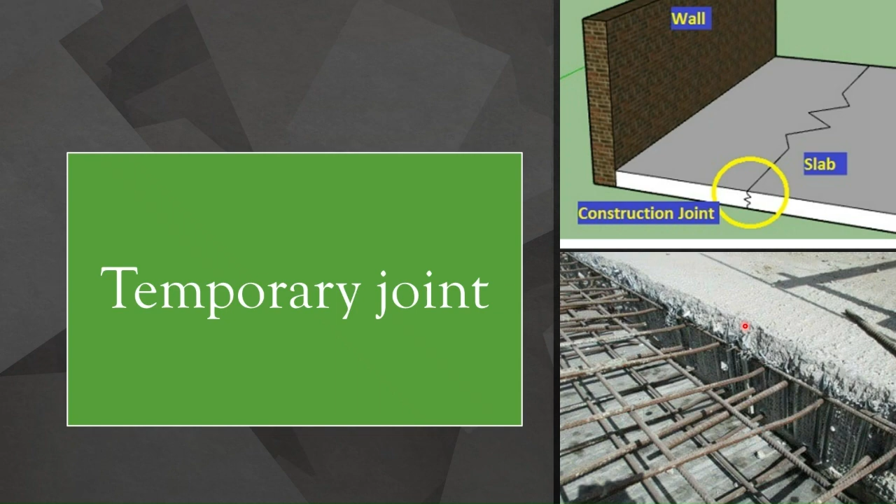The purpose of construction joints. It allows a continuation of work after a break in concreting, and it also helps to manage shrinkage, and it allows structural integrity and load transfer between old and new concrete. And it also prevents uncontrolled cracking.

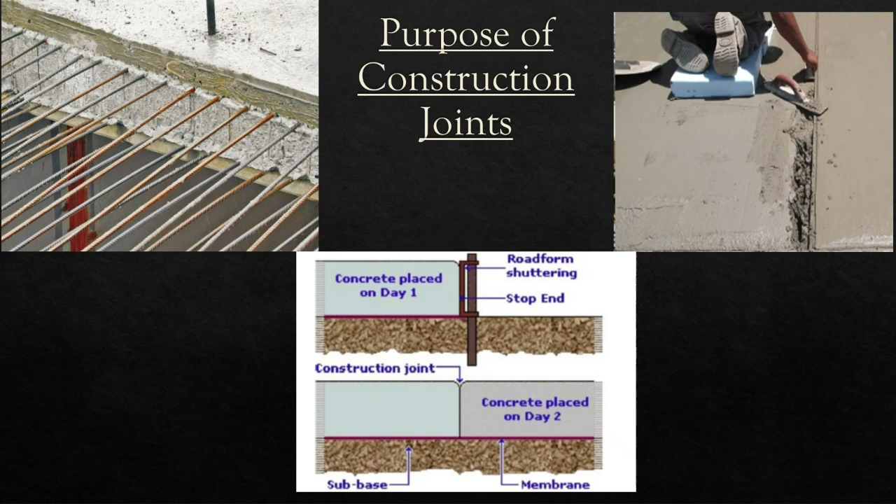Types of construction joints. First one is vertical joints. Vertical joints are common in slabs, beams and walls. And next one is horizontal joints. It is mainly found in columns and walls when concrete is poured in lifts.

Next one is keyed joints. It includes interlocking shapes to improve shear. And next one is dowel joints. It is mainly used with steel dowels to transfer the load across the slab.

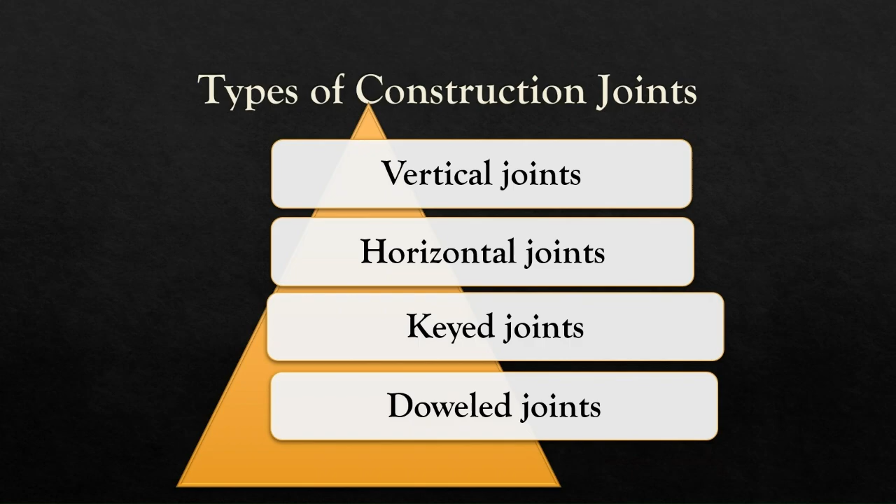In beams, construction joints can be provided near the point of minimum shear. And in slabs, it can be provided away from concentrated loads or mid-span. And in columns, it can be provided just below the beam or slab level. And in walls, it can be provided above the base or aligned with the floor levels.

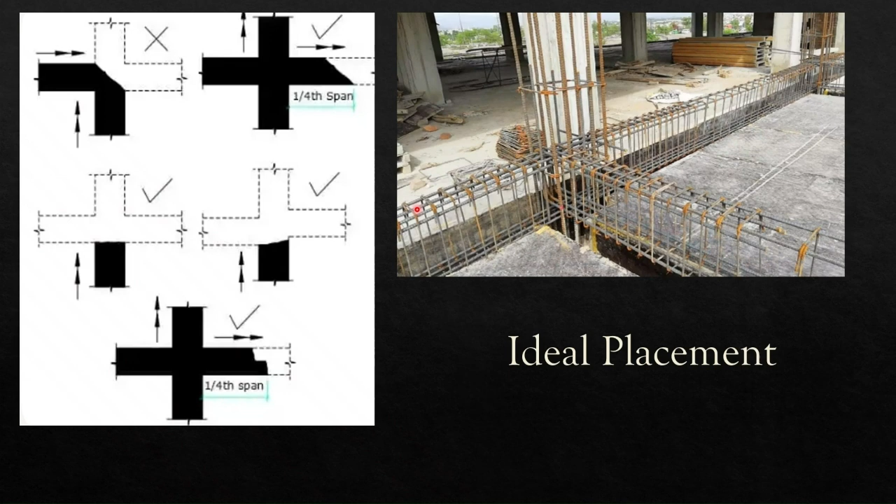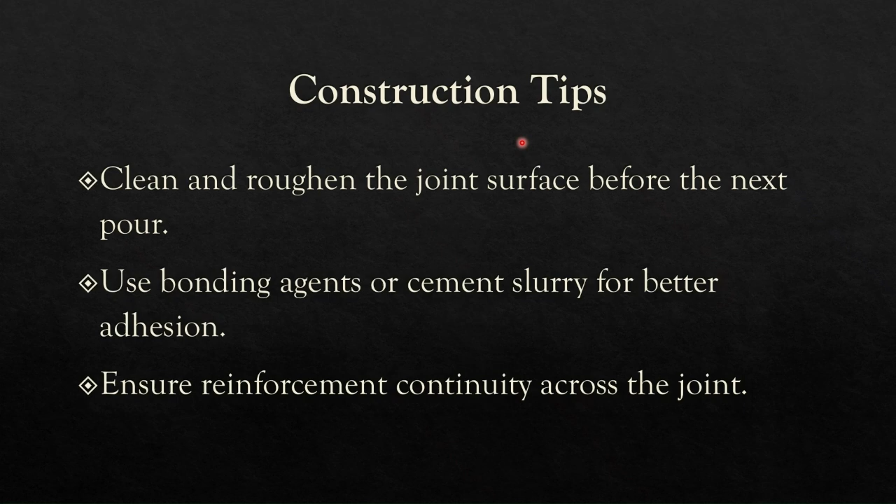Construction tips of a construction joint. First, we need to clean and roughen the joint surface before the next pour. And next, we can use bonding agents like cement slurry for better adhesion. And we need to ensure reinforcement continuity across the joint.